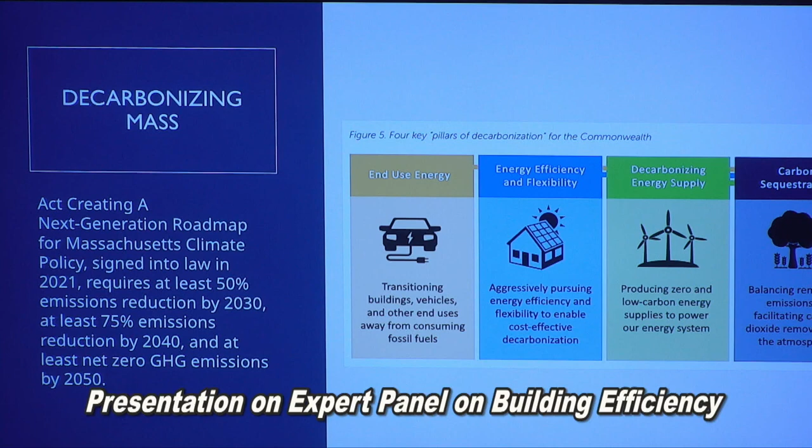So some of you may be familiar with Massachusetts' efforts to decarbonize, part of a global effort to reduce greenhouse gas emissions. But in 2021, the governor signed an act creating a next generation roadmap for Massachusetts climate policy. And as part of that, the state committed to a 50% emissions reduction by 2030, as well as a 75% emissions reduction by 2040, and aiming for net zero by 2050.

There's a few different facets that the decarbonization roadmap laid out for us, touching on transitioning buildings and vehicles to electric, decarbonizing our electric grid, and working on carbon sequestration efforts as well. Tonight, we're going to be focusing more on the building sector and what we can accomplish there.

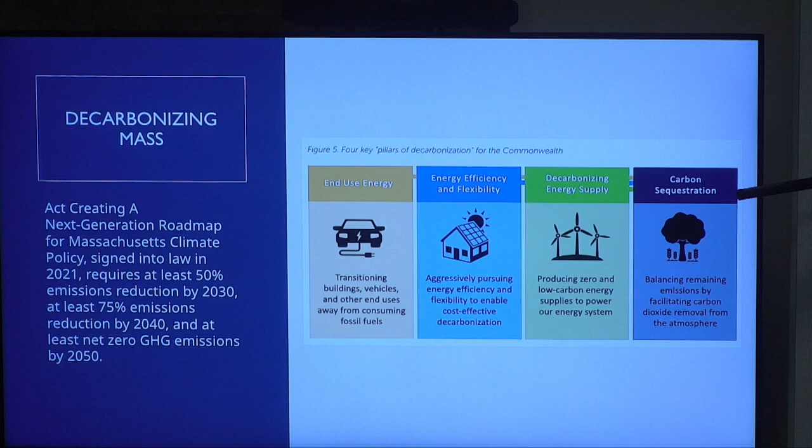Sherborn is also doing its part in Massachusetts statewide efforts to decarbonize, having declared a climate emergency at the last town meeting last year in April, where we are also, as a town, aiming to achieve net zero carbon emissions by 2050, and working to reduce emissions as quickly as possible in advance of that as well. So that sets the stage for some of the work that the town is doing around our Climate Action and Resilience Plan.

Some of you who have seen me before know that we are in the process of working on that, through a grant from the state, a $38,000 MVP action grant to develop that plan, where we're coming up with strategies across multiple sectors in town to reduce greenhouse gas emissions, as well as better prepare the town for climate impacts and be more resilient.

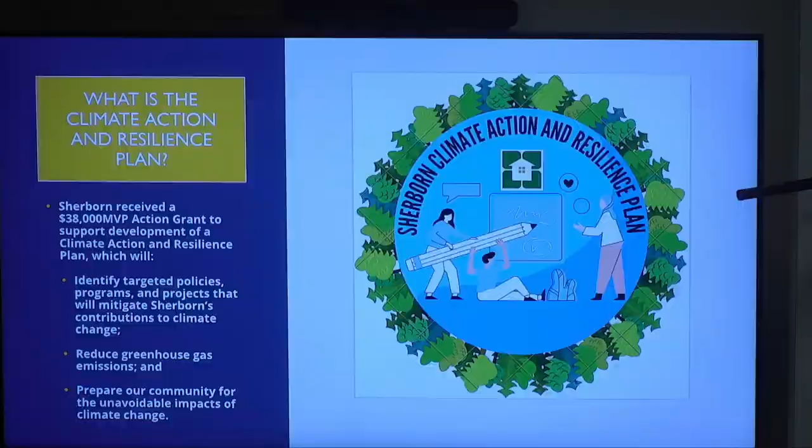Again, just to set the stage for why this matters so much for the town of Sherborn, if you look at greenhouse gas emissions coming from the town, an actual slight majority, 51%, are coming from buildings, and primarily 41.6% coming from residential buildings. So we know that in order to tackle this big carbon problem that we have, to really reach these targets that both Sherborn and the state and our country have set forward, we're going to really need to tackle this emissions and efficiency in our buildings.

And there's all these co-benefits that come with it, like reduced costs over time, more stability in our utility costs, better comfort, indoor air quality, etc.

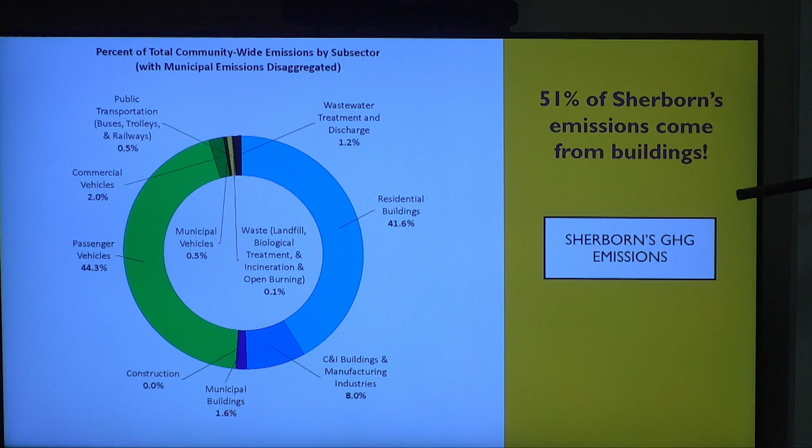So with that, as I've already mentioned a little bit, Sherborn has already been working on this for some time, having become a green community in 2012. And as part of that, had already adopted the stretch code. So all the green communities, as part of their process of becoming a green community, adopted the stretch energy code. We're going to hear a lot more about that coming up in our panel.

And for all green communities, including Sherborn, the updated stretch code that just was released is automatically taking effect. We're going to hear a little bit more detail about what that looks like, as well as this municipal opt-in specialized code. John's going to tell us all the details, all the nitty-gritty that you could ever want to hear about how that works. But that is something that will need to be adopted by each municipality and will be on the docket for Sherborn coming up soon.

I just really like this visual. This is also from the decarbonization roadmap. It really sets the stage for how we're all going to play a role in the future of Massachusetts as it becomes decarbonized. We're going to be looking at electrifying our vehicles, relying more on public transit and active transportation, but also really working on decarbonizing our buildings—new buildings as well as deep energy retrofits of all our existing buildings, because we have pretty significant building stock already here in town.

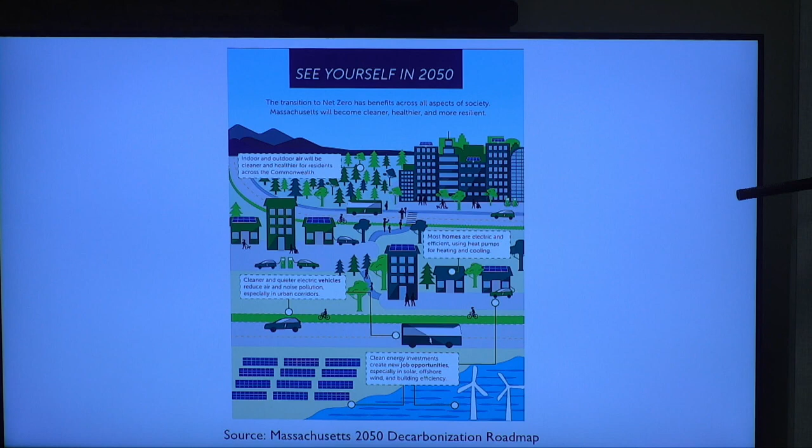And I think that's my last slide. So I'm going to hand it off to Brad.

I don't think we need to hold the mic, actually. Dorothea handed it to me and I just kind of kept holding on. If you're getting poor sound levels from me, I'll just grab the mic and move it more central. Okay, sounds good.

All right, Brad, why don't you start with a quick intro of yourself. Sure. Hi everyone, my name is Brad Karalius. I'm an elected member of the Sherborn Energy and Sustainability Committee. I moved to Sherborn in June of 2018. I have two kids at Pine Hill, a first grader and a fourth grader. We came from Framingham. I am not a professional when it comes to this type of stuff—I'm just kind of a DIYer. I like this stuff, it's important to me.

And I am very data driven—my day job is I'm an epidemiologist. So I recognize the importance of all these initiatives as they relate to ecological health and in turn human health. This initiative is important to me, and it's also something I really needed to do for my own home for a number of other reasons. So I'm just going to take everyone through my own personal journey of home efficiency upgrades and greenifying my home a little bit.

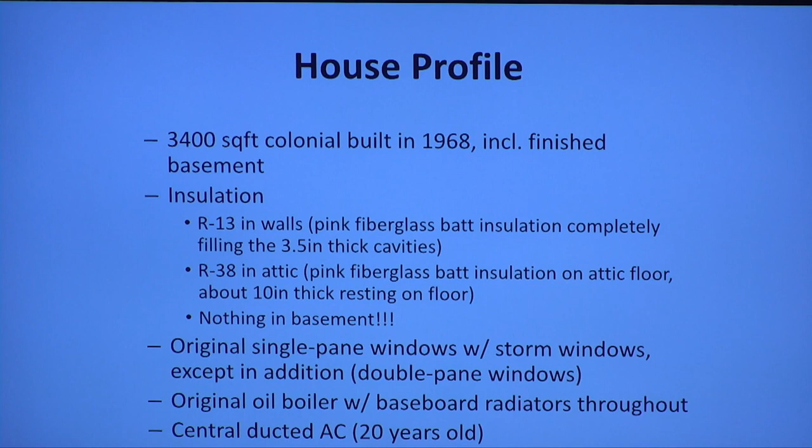It's the pink fiberglass that's in the walls. For the attic, it had a whole bunch of pink fiberglass, batt insulation on the floor, about 10 inches thick. It was a pretty big mess up there. I'll get into this later, but it was interesting—when I was updating the attic and pulling out a lot of that old insulation, I realized it's just a perfect habitat for mice. I discovered well over 1,000 mouse turds and carcasses and skeletons. So it was a hot mess.

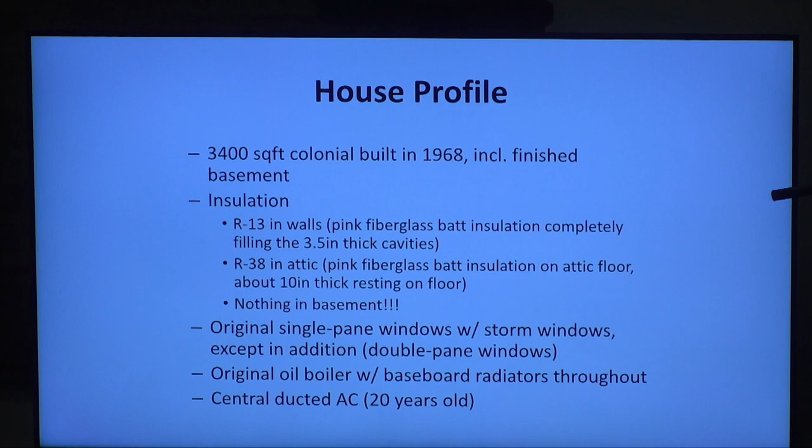There's nothing in the basement, even though it's supposedly a finished basement—there was no insulation in the basement walls. For windows, original single pane windows with storms, with the exception of an addition that does have double pane windows. It had the original oil boiler with baseboard radiators, so that's how heat was distributed throughout the house—a 1968 oil boiler. We had ducted air conditioning, and the system was 20 years old, so it was aging. I recognized all these things, and it had me a bit nervous.

I spoke with the former homeowner just to get a sense of what he was spending on energy, because previously our home was a 1,400 square foot cape in Framingham. So moving here, I figured it was probably going to cost us quite a bit more to heat and cool this place. Here's the description from the former homeowner: he told me that during the winter, they would set the thermostat to a daily average of 62 degrees Fahrenheit with offsets at night.

There was a fire in the fireplace most nights. They consumed about 1,100 gallons of oil per year to heat it just to 62 degrees. And their annual electricity consumption was about 16,500 kilowatt hours. So I knew that this was not going to fly. Again, I have 2 young girls and I have a wife, and they like the house warm.

And so when I heard this, this was my response. I was mortified. I was really worried, and I was like, all right, I gotta start tackling this issue. And so that was kind of the original impetus.

So the first thing I did was I worked on insulation and air sealing upgrades. And this is always going to be your best bang for the buck. It's going to be your fastest return on investment, and it works regardless of what type of heating and cooling system you use. So what I did, again, I moved in June 2018.

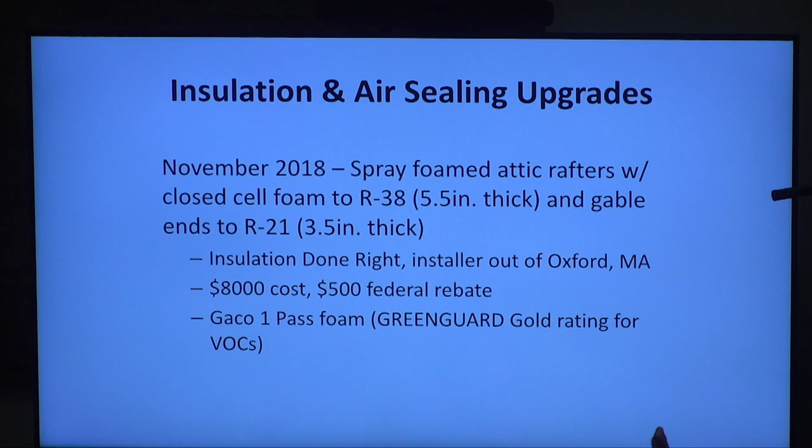So just a few months later, I hired a contractor to spray foam the attic rafters with closed cell spray foam. So the interior of the attic, the ceiling and the walls were essentially spray foamed. So it's insulation, but it's also air sealing, so it doesn't allow air exchange with the outside.

The contractor was Insulation Done Right. They came highly recommended by, I think, Rogers out of Framingham, which you probably see their truck around, but they don't do spray foam, so they told me to go with this guy, and I was really pleased with them. It was an $8,000 job, but $500 in federal rebate, and the product he used was called GACO One Pass.

It has a GREENGUARD Gold rating for VOCs. VOCs are volatile organic compounds. It's just not good for you. You don't want to breathe them. But this stuff is what they use in schools and hospitals, so that made me feel good too. So here's a picture of kind of the results of that. If we just forward, please.

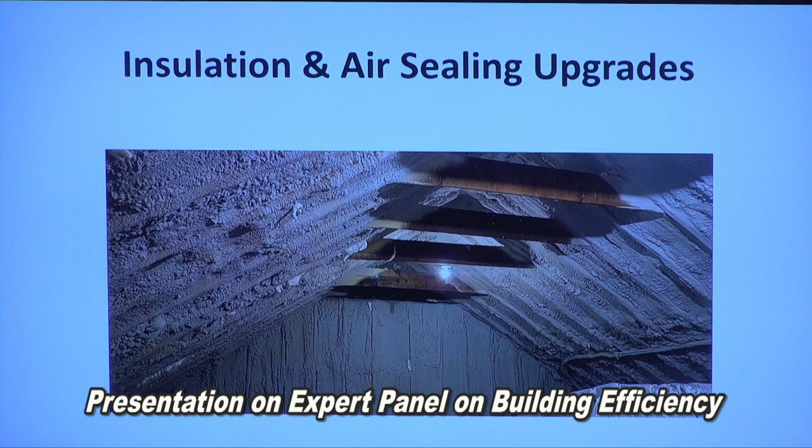So now here's the attic. You can see the foam up on the ceiling and at the ends. The nice thing about this too is it brings the entire attic into the conditioned space of the house. So now the attic is pretty much at the same temperature as my second floor.

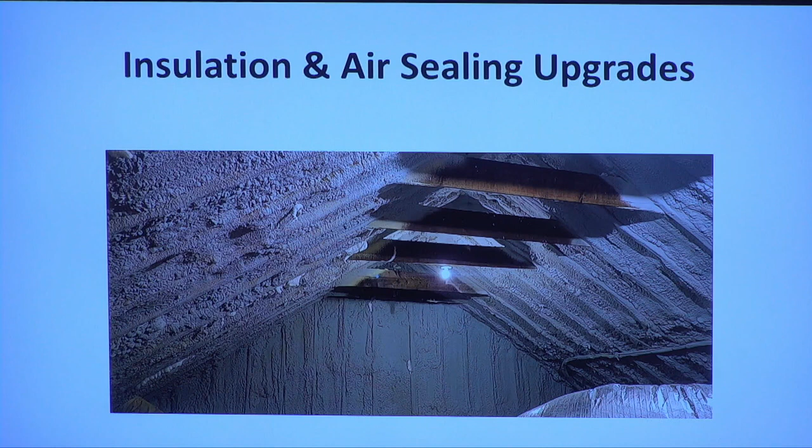And so if you run ducts through the attic, which a lot of people do, it becomes much more efficient now when you have that conditioned air going through a conditioned space, rather than it having to fight against 110 degree temperatures in the middle of summer when you're running your air conditioning. So that was an added benefit too.

So the next thing that I did on this journey was I did some do-it-yourself air sealing and basement insulation, because again, the basement was not insulated at all, but yet it's finished. So someone dropped the ball there. So I installed weather stripping along door thresholds in the basement. I'll have a picture of that too. I spray foamed areas where I detected air infiltration, where you could just feel that cold air rushing in the winter time.

And then actually, just up the street from us in Framingham, there's a company that has reclaimed insulation foam panels that you can get for really cheap compared to brand new. And so I ended up going to them. I bought a bunch of reclaimed foam panels, and I've been putting that up against the interior concrete basement foundation walls.

So here's just a couple pictures of what I've done. On the left side, you can see the weather stripping. It's just this kind of line of white foam. You just buy it at Home Depot. It's got adhesive on it. You just stick it right on. The door presses up between it and the threshold, and it prevents air from moving through.

Now, during the winter time, before I had done this, I just felt cold air rushing into the basement, and the heating system had to fight hard against this. And so these small little solutions that I implemented had a profound impact on how much energy I was using to heat the basement, and the comfort level too.

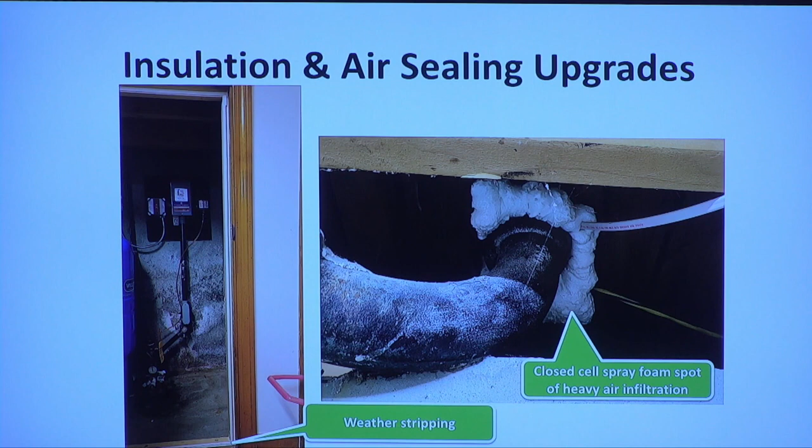And so on the right side, it's just where I used a can of spray foam to hit another spot of air infiltration where a pipe is kind of leading to the outside. We can advance, please. And so this is, you can see some foil-faced foam panels in my mechanical room.

Up on top, I insulated the rim joists and sill plate with more foam and spray foam. And so I'm actually pretty proud of this work because, over the cold snap that we had a few weeks ago, my basement never got below 50 degrees. And we didn't have any burst pipes or anything, and we have a lot of water pipes in the basement. And I do attribute this to a lot of the work that I did.

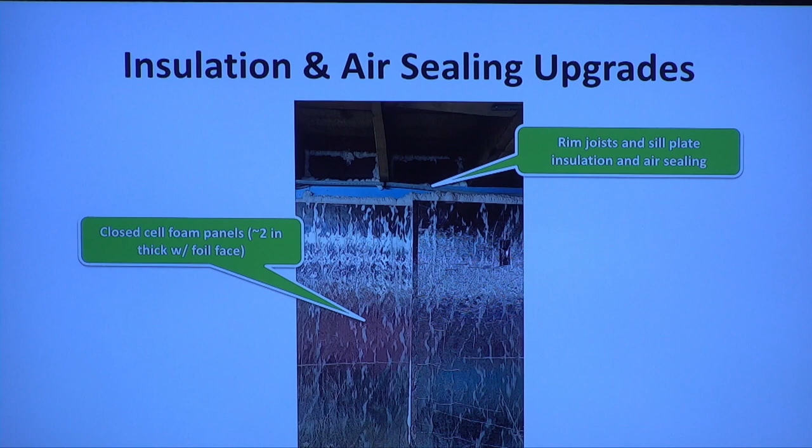Because in our neighborhood, we had a lot of neighbors who had some pretty serious damage. But by hitting all of these spots of air infiltration and insulating the basement, it kind of equilibrated to that ground temperature in the area, 50 degrees, and I saw that on the thermostat, so that was really cool to see.

So the next major retrofit I did was I stopped using our old oil boiler and I installed air source heat pumps to heat and cool the entire home. This was done in March 2019, so a little bit after the insulation work, the spray foam work, but still very early in the process. This system was sized to meet the heating and cooling demands of the home. What it entailed was 2 Mitsubishi Hyperheat multi-zone heat pumps.

So these two heat pumps sat on the outside of the house, and they would each feed to 3 indoor air handlers, mini air handlers that would sit on your wall. And those would spit out the conditioned air, whether it was hot air or cold air. The combined heating capacity of these heat pumps was 57,000 BTUs at 5 degrees Fahrenheit. I did have my house evaluated to check what it needed under that design temperature, and it did meet that demand.

It allowed me to get $8,000 in rebates from Massachusetts because they were sized to meet the entire heating load of the house at that low temperature. The installer was Tom Fricker out of Franklin. He was great. We had to adjust the system a little bit, and he was very receptive to my asks there, so I was really pleased working with him in the long run. It was 28 grand for the system. Then you subtract out the 8 grand in rebates. I financed the rest with a 0% loan through the Mass Heat Loan Program.

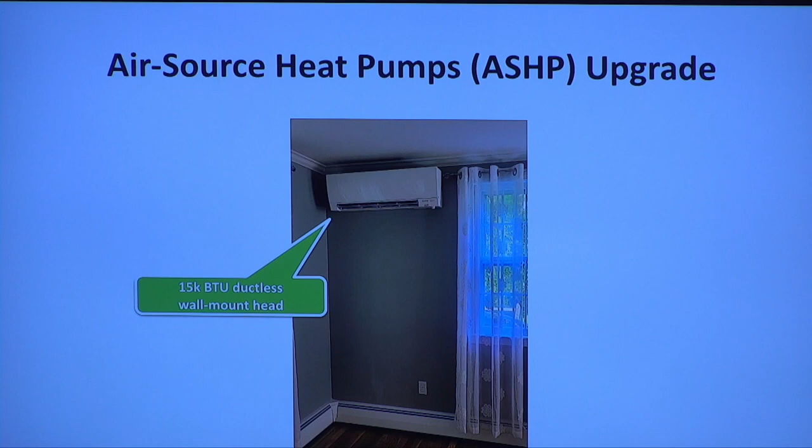Here's a picture of one of those indoor air handlers. I call them heads. This one puts out 15,000 BTUs at capacity, and this is in the living room. He's the big guy because you match it to the space that they need to condition. If we want to advance, please. The previous slide was on the first floor. This is also on the first floor of my house. Now we have a 12,000 BTU unit. This is in the den that faces out to the backyard.

Something that I wanted to call out here was that I ended up putting in a reversible ceiling fan, which really helped with, I felt, comfort and efficiency. Because with our older homes, and my home's over 50 years old, you're gonna have a little bit of unevenness with heating, based on the windows not being super efficient or the walls. But partnering this ceiling fan with that air source heat pump air handler turned out to be a really great pairing, and I've been really pleased with it. So when I do my energy coaching, I oftentimes recommend this kind of pairing.

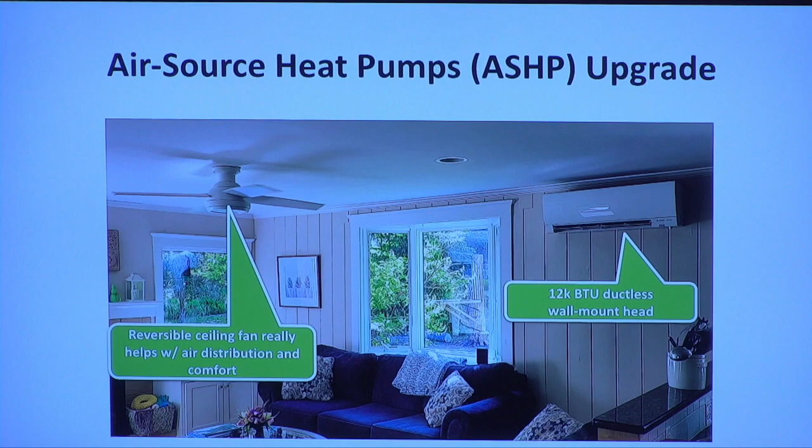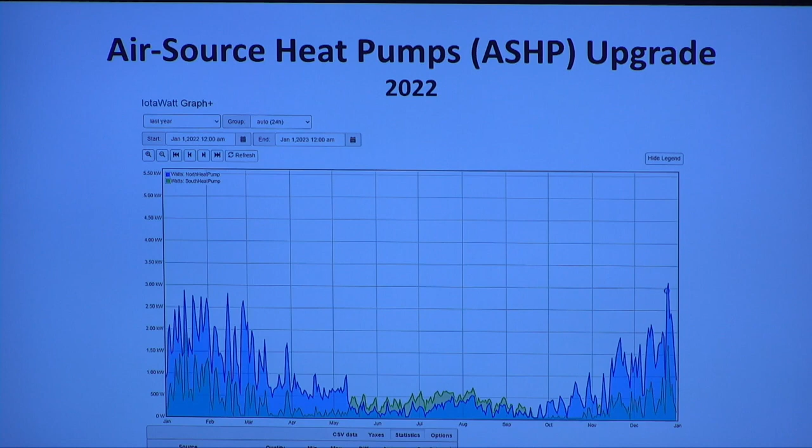On top of that, the incentives include, I got in early in the SMART incentive system, so I was block 2, which means for every kilowatt hour my solar panels produced, I got back from the state about 13 cents. So you multiply that, they make a good amount. So you crunch the numbers, and it ends up being a nice paycheck. And then of course there's net metering too, which means that every single kilowatt hour that your panels produce gets credited towards you. Even if you're not actively using it, it's still going to get credited. And so it's not going away.

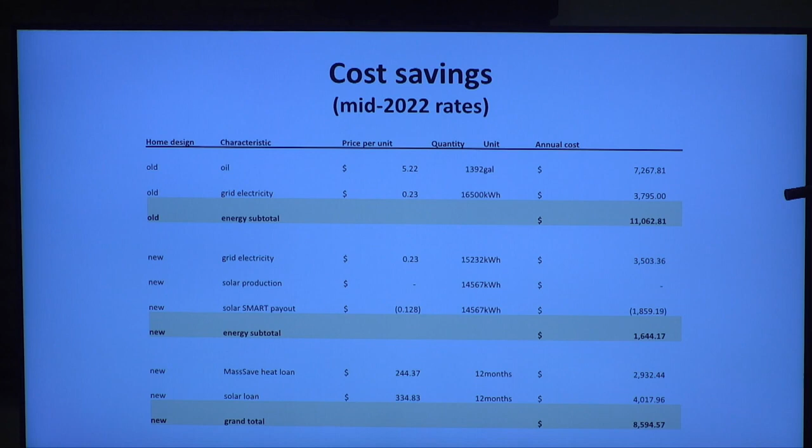So this is kind of my last big slide. This is where I crunch numbers to understand, had I kept my old system in place, what would I be spending in energy, and under the new system, what am I spending. Dorothea, one of our sustainability coordinators, had me do this, and I hadn't done it before. When I crunched these numbers, it blew my mind. It was pretty crazy.

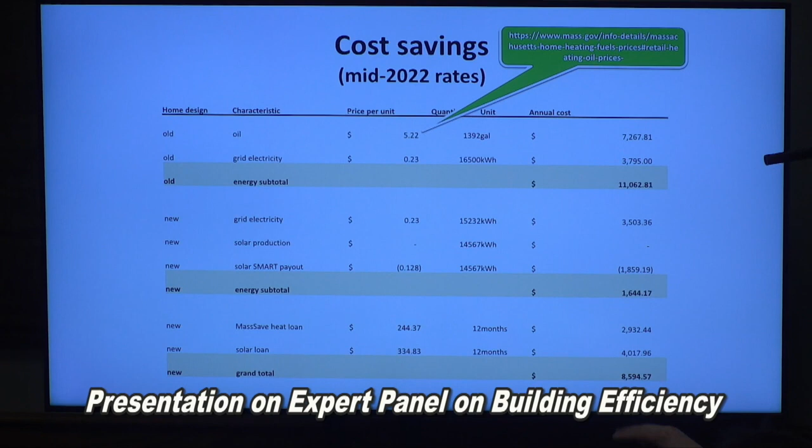A lot of these prices, like for oil, I took from reputable sources. Massachusetts has updated prices on oil, so I pulled these statistics based on mid 2022 rates. Oil was going at a little over $5 a gallon. The former homeowner said they were using 1,100 gallons. I scaled that up to about 1,400 gallons because they were a family of two only heating their house to 62 degrees, and we wanted it at 70. So this is probably a very conservative underestimate of what we would actually be using for oil.

So it was $5 for oil, 23 cents for grid electricity. I used their 16,500 kilowatt hours. I crunched the numbers - I would be spending 11 grand per year under the old system.

Under the new system, I consumed about 15,000 kilowatt hours of grid electricity. The rest I covered with my solar production. That's a 3-year average.

So that 15,000 kilowatt hours of grid electricity, that's what I consumed in 2021, at 23 cents per kilowatt hour. The solar production is a 3-year average. And then I have my smart payout, where I'm getting about 13 cents per kilowatt hour from my solar panel production. So you crunch those numbers, and I end up spending $1,600 per year. So it's $11,000 per year versus $1,600 per year.

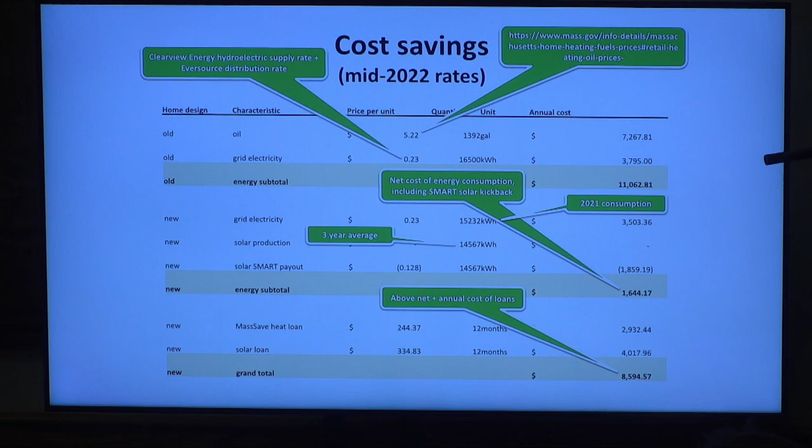So that's my path. I've massively offset my carbon, I've made the house more comfortable, and I've saved money in the process. So it's kind of cool. It's a great story. Thanks.

Sure. So I am a certified passive house builder. I have been in the green construction world for a little over a decade now. I got into it because I have a deep appreciation for restoration, and my first introduction was doing retrofits in a restoration project in Lowell, Massachusetts, which was at the time the oldest LEED Platinum certified building in the country. That was my introduction to green building, and I've since continued to pursue that, with the aim of building better.

That has been my goal since I started over 26 years ago building. I did a couple of restoration retrofits, one on the Concord Scout House in Concord, Massachusetts, and the UTEC, now the UTEC Youth Center in Lowell. I've since gone on to become a certified passive house builder, which is the most stringent energy code in existence. I've been engaged in passive house for about six years, applying these standards, and I applied it to my own house as well. It is not a certified passive house, we don't need to go into that, but I'm applying all of these principles and standards for several reasons.

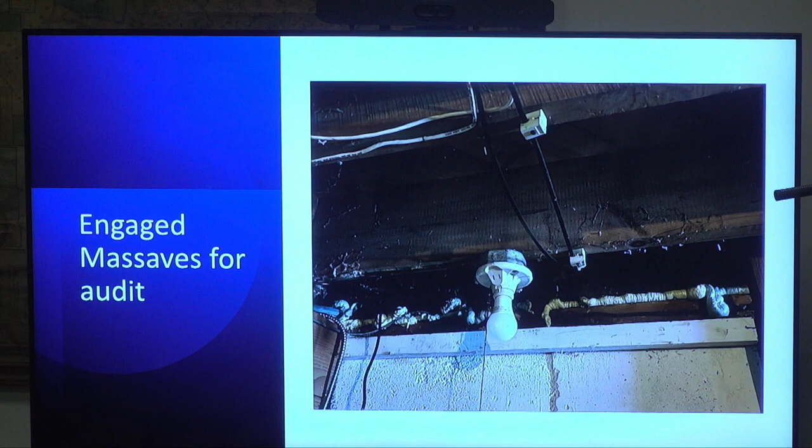At the time when we bought the home, it only had an electric range where half the burners didn't work, so we had to replace it. I wanted to cook with gas because I'd always thought cooking with gas was better, but I didn't have that option. So I got an induction range, which is something I strongly recommend. Now that I have one, I will never go back. It's extremely efficient, I've saved a lot of money on electricity, and I can boil my hot water for tea in a minute. It's amazing. Until I owned one, you couldn't have convinced me otherwise.

So Mass Save came out, we did the audit, filled out the paperwork, and were able to get a company to come in. If you advance to the next slide, this is another example of air sealing around wire penetrations, and the whole perimeter of the basement was exposed so we could get at it.

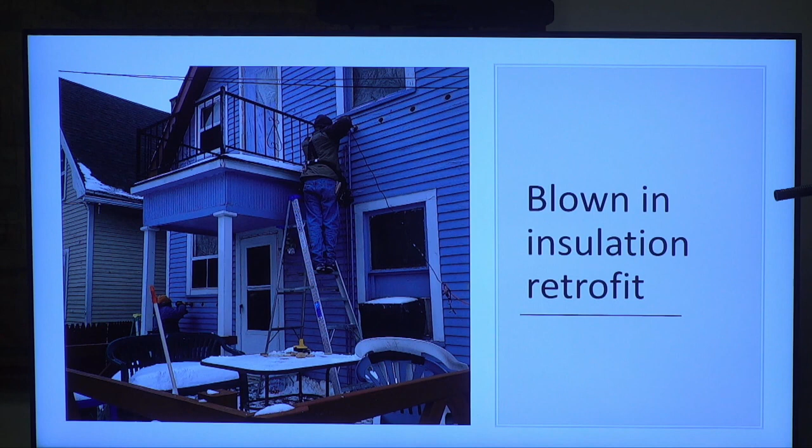This isn't my house, but it's an example of how they do a blown-in insulation retrofit. They remove pieces of siding, drill holes in several locations in a stud bay between the studs, use a tube, and inject cellulose, recycled newspaper and cardboard, into your wall cavities. It's a great insulation, it's a recycled product, and it's fairly inexpensive.

With the rebates, they covered 75% of the cost. So to insulate my entire house, which had none, the bill came to about $7,800. We paid $1,800 out of the whole thing.

That was advanced to the next... sorry, slide. That's right, I'm so fascinated I stopped.

With the original single pane windows, I knew I was going to have to replace those. But even at the time, just blowing in the insulation, I didn't have the budget or the money to replace my windows or do all the work you're going to see next. Just the insulation alone and the air sealing dropped my oil bill by 60% right off the bat. My heating bill was astronomical for a 1,500 square foot cape, oil burning with zero insulation. I was definitely filling my tank much more than you were. So that decrease in cost was immediate, and even the experience in the space was immediate.

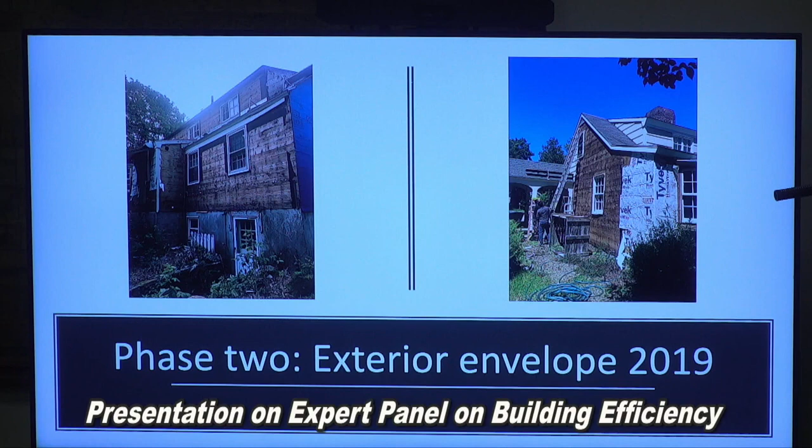A little bit later on, we saved up some money. Being a professional builder, I knew I didn't want to just put replacement windows into the openings of the old windows, I wanted new construction windows. That meant I was going to have to strip away about 40% of the siding on my house anyway, so that was an opportunity to strip the rest of it. I also needed a new roof, it was growing moss, which looked kind of cool if you're into living roofs, but that's not really how it's supposed to work. So I knew I had to do a complete renovation of the exterior, and I saw that as an opportunity to really apply passive house standards and make this home as efficient as a 1951 Cape can be.

I did this alone, so it took a long time. You may have been driving by, I'm sure I might have waved at a couple of you.

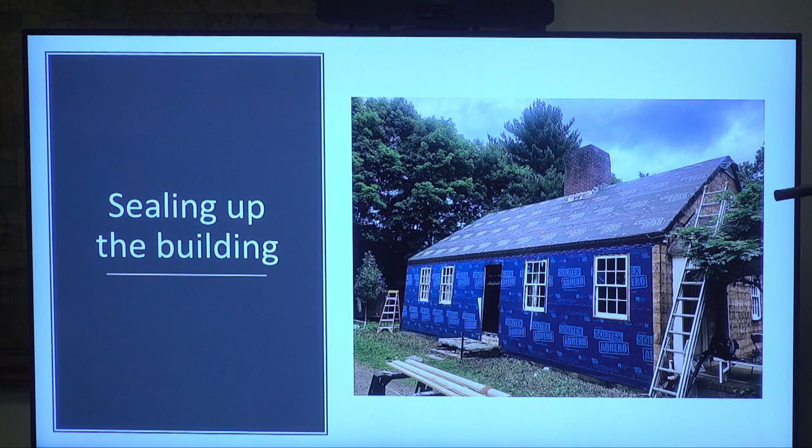This is a vapor open membrane, a special membrane designed in Germany that's been used since the 90s. It makes a home airtight, but if there's excessive moisture inside the wall cavity, it allows that moisture out. It's counterintuitive, but it works sort of like a Gore-Tex jacket. When there's excessive heat and moisture, it opens up to allow the moisture out, but when it's really cold, it tightens right up, creating a nice air seal and stopping the transfer of energy.

I completely stripped out the building, even cut the overhangs off. When wrapping a building, you want to make a continuous connection, roof to walls, walls to foundation. It's really important to make that connection at the foundation, and there are primers and tapes that will stick to concrete. Little by little, I wrapped this building, tightened it up, and then proceeded to put in the windows.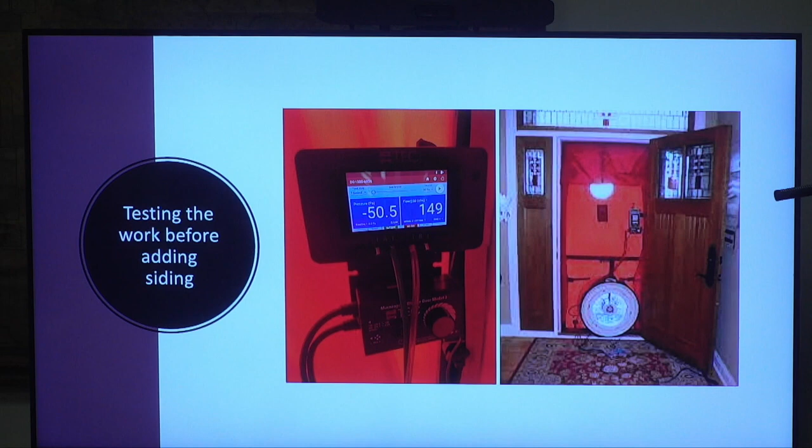This is the equipment we use to test it. You set it up in a doorway, it intentionally sucks all the air out of your house, and then measures the air going across that fan at a certain rate. It will tell you how much leakage there is in your house and how many times the heating system has to condition the air in that space before it leaks out of the building again.

So heat moves. We all know that heat rises, right? That's pretty common knowledge amongst everyone. But the reality is heat moves in all directions. Yes, warm air rises, but it radiates, and through convection, it's constantly moving through your space. So we're dealing with convection, conduction, and radiation in many different ways throughout our building.

So like if you think about the chair you're sitting in right now, if you were to get up, go outside, and come back and sit down, the chair would seem warm to you. That's because you're radiating your body heat into that material. So the exact same thing is happening in our buildings. It's our conditioned space warming up the drywall, the 2x4s, the sheathing, and the siding.

And just like a battery will pull positive energy out of it to operate, our buildings are pulling that heat right through the material and out into the cold space. Heat always moves to cold. That is just a scientific fact, and it moves in all directions.

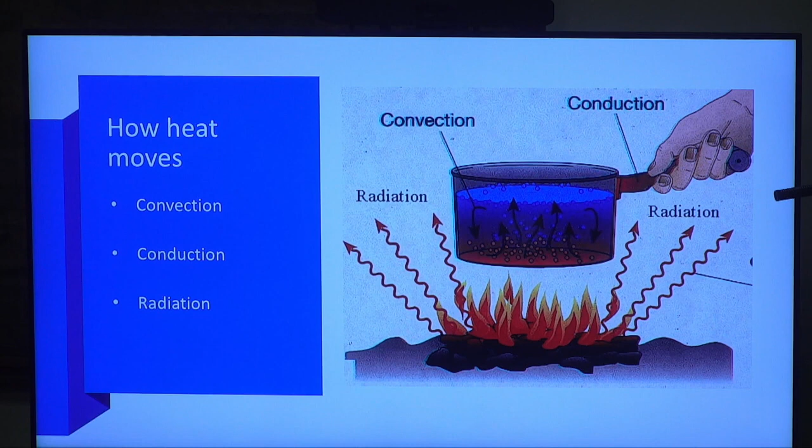So stack effect. For you that have wood stoves, you understand that you light the fire, the smoke goes up the chimney, but it's got to bring air from somewhere else, right? So it's pulling it through the vent and pulling the air from the space so that it can allow that smoke to go up the chimney. Well, your building works in the exact same way.

You're conditioning the space. We're inside of it. We're 98.6 degrees, we're creating heat. We're cooking, we're creating all this warm air, which rises. And if you think of your building like a big chimney, that air is rising up through your space and out through your attic and through the vents and all the leaks.

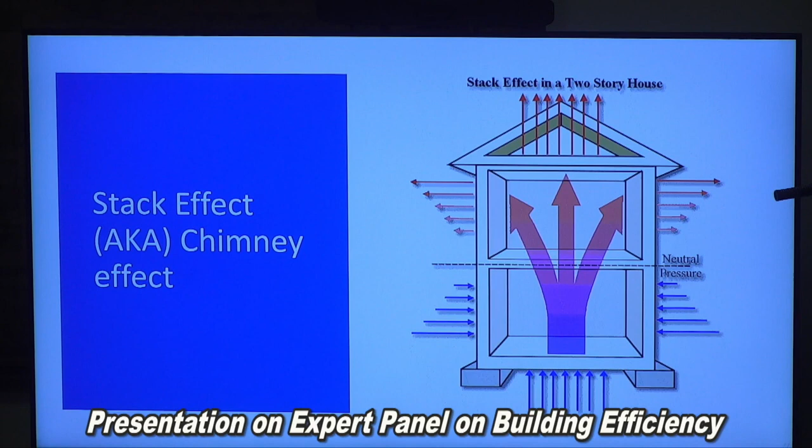And it's pulling cool air from somewhere else. So all the cracks in your foundation, if you've got gaps around your pipes coming up through the basement floor, or you have a hose bib that goes out for washing your car, it's pulling that cold air through all those gaps and bringing it into the building. So now your heating system has to condition that air again, and then it sends it right back up. It's a constant chimney effect happening through your house.

So we use this term thermal bridging, which in the passive house world, our buildings, we aim to make them thermal bridge free. So what that means is we're actually creating a break from that energy being pulled through your 2x4s, your flooring joists, and your rafters out into the cold environment. And there's a couple methods of how we actually do that.

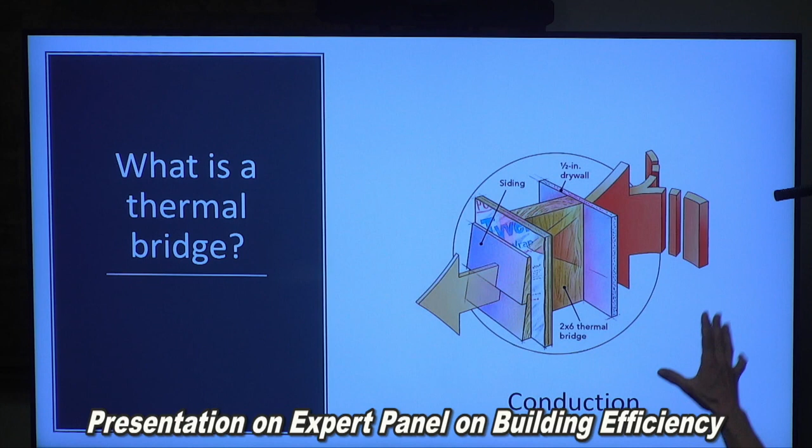If you're remodeling your home, there's really one go-to technique, which you're going to see in the next slide. But before that, just to clarify: your space inside is 70 degrees, and let's say it's 20 degrees outside. That drywall is heating up, transferring it to the 2x6, transferring it to the plywood, which is transferring it to all the solid materials that are pulling that energy through the building.

If you go to your next slide, please. So this is a picture of a code-built house prior to 2021. My friend John Hyde's going to talk a little bit more about the code portion of this after. So this was actually a well-built house. It's well insulated, we really don't see any gaps in the cavities.

But in the cavities you're getting an R value, and at that time it was around R28. I really haven't paid much attention to building codes, because I build passive house, which far exceeds the codes, so I'm building to a different standard. But you can see through this thermal image these are all the 2x4s, the floor joists, the rim joists, the rafters—all of those are a thermal bridge, and they equate to R7. You get about R1 per inch with wood. So about 25% of your building is solid wood, maybe a little bit more. So you may have R28 or R30 in your wall cavities, but 25% of your building is only R7.

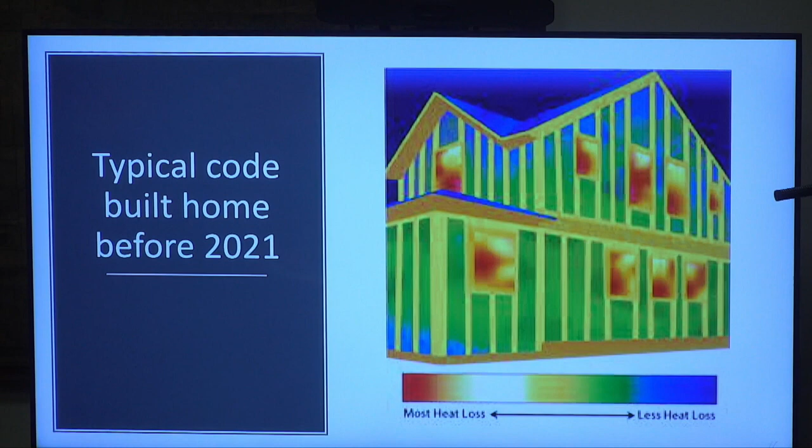So back to my house again. What we're doing is creating a thermal break. Foam does not conduct heat transfer.

That's an R12 sheet good, foil-faced. It's just like your favorite cold beverage from Dunkin' Donuts, iced coffee. A lot of people ask, can I have a styrofoam cup? They put it in a styrofoam cup, and now it breaks that warm summer temperature from touching the cup and creating the rings, sweating, and condensation.

That's what's happening in our walls. When you have an extreme transfer from warm air to cold air, there's condensation when that warm air hits a cold surface. Similar to your favorite adult beverage you take from the fridge out to the picnic table on an 85-degree day—within a few minutes it turns to condensation. That's the relative humidity in the air condensing when it hits something cold.

That's also happening inside our walls. If you could look with a microscope or had x-ray vision, with an uninsulated wall and it's negative 12 degrees out, like it was two weeks ago, the warm humid air going through your wall cavity and hitting the sheathing turns to frost on the inside of your wall. Eventually that melts and goes somewhere, and wet wood creates mold.

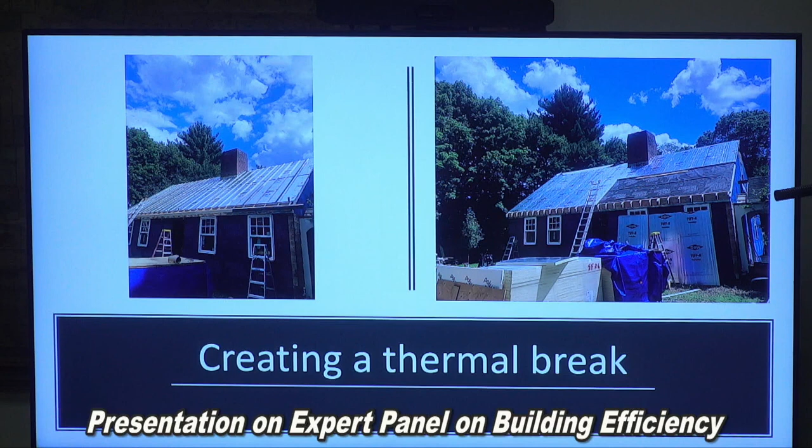When the sun is baking down on that roof, I've clocked temperatures of 146 degrees on a summer day on the roof surface—that's radiant heat, now heating up your attic space or your bedrooms in this little cape. You're actually taking on heat from the outside, just radiating through your roof, unless you create this thermal break and vent space.

Move to the next slide.

I put in new construction windows because I knew there was no insulation in the walls, so it wouldn't do me much good to just put a replacement window in my existing frame. I decided to take the windows out and put in new construction windows because I can tape those up and seal them much better to my building assembly than replacement windows.

So the entire building's now been wrapped. That's just conventional tar paper on top of my second layer of sheathing—I don't have to use anything fancy. Tar paper is an awesome product we've been using forever.

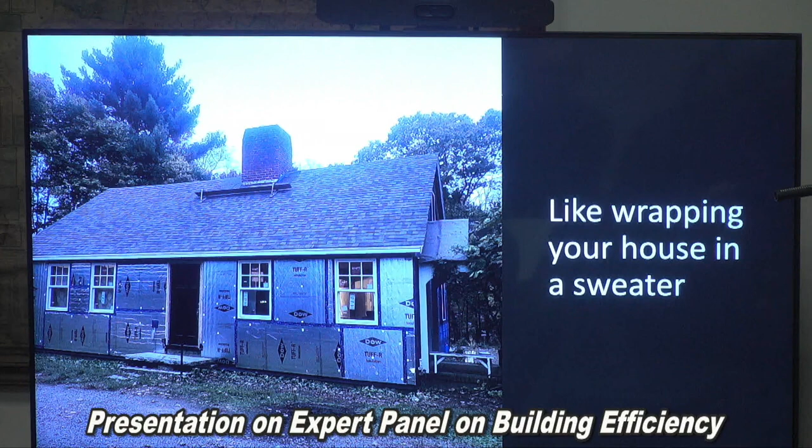All the seams get taped on all the foam, giving myself a second shot at air sealing everything. And then I just went ahead and put a new roof on.

Now your sidewalls, similarly—this is called a vented rain screen that we've created. There are a couple different ways you can do it, but this is the most common. These vertical straps are the nailer for my siding, and what you can't see behind this little trim board on the bottom is I actually have vent strips, so air can flow up behind my siding, all the way up into my vented soffit, and those wood strips on the roof create a vent that allows it to go right up through convection. The warm air just naturally follows that path right out the top of the house.

So now when it's 140 degrees baking down on my roof, because I have that little airspace, you can measure the temperature at around 85 degrees. It's cooling it at the surface before it heats up my building and creates uncomfortable conditions in the attic space.

Once I sealed it all up, after working all day, my dirty socks—that smell lingers because now my building's really airtight. So I've got to bring in a mechanical system to give me good, fresh air exchange.

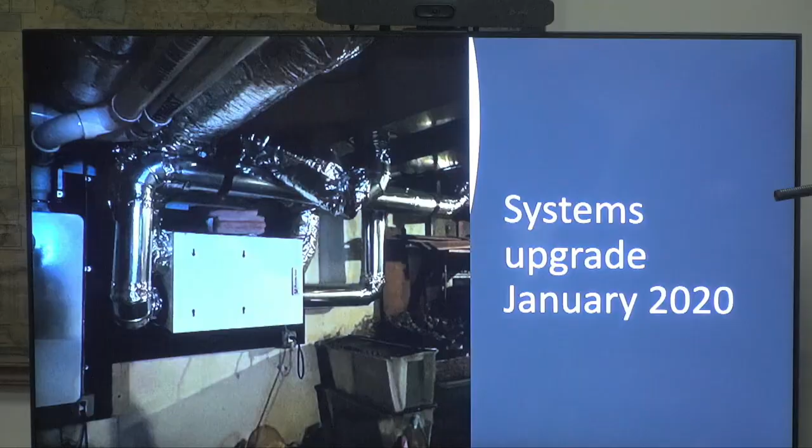So now I'm preheating that 20-degree air that's outside to maybe now it's about 64 degrees by the time it passes that coil. And my heating system only has to work just a little bit just to bring it up to the temperature I want it. So I'm not just blasting my house with like 15, 20-degree air as I'm bringing fresh air into my house. There are filters in this that are already filtering for the first time the pollen and the dust that's out in the air before it enters my HVAC system.

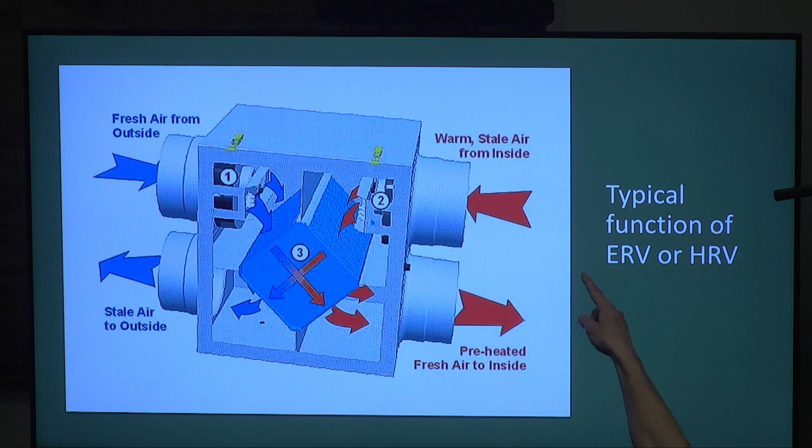Next slide, please. This is a diagram of exactly how that works. You can see the fresh air from the outside coming in at the top, comes across that coil at the same time that the warm air from in the house is going out and transfers that heat to the cool air coming in. Slide, please.

Ooh, well, slight fail on that slide.

My fault. This is my new heat pump system, which I could just integrate right into my HVAC system because it already existed. I like this because it's a whole house heat pump, and I don't need the cassettes, or the heads that Brad was describing earlier in the different spaces in my house. This also has a very high MERV rating, which is a high filtering system.

So I've already started the filtered air from outside through my ERV, which stands for Energy Recovery Ventilation. There's HRV, Heat Recovery Ventilation. They both do the same thing. The only difference is an ERV will also transfer moisture, where a heat recovery ventilator only transfers heat. But that's beside the point. So now I'm filtering the air in my house a second time with a much more dense filtration system.

It cuts down on the dust, and for somebody that used to get sinus infections twice a year annually, I haven't had one since I put this system in. And that's just my personal health outcomes. I know this is true for others who have also had skin irritations.

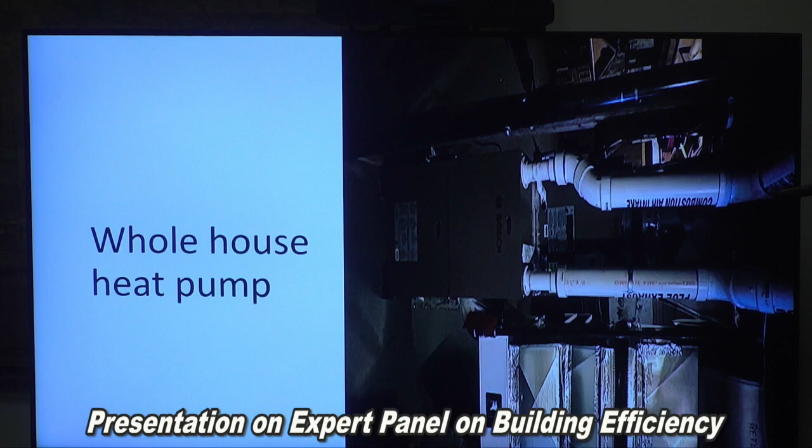Some issues. Bringing that mic towards the other mic. No?

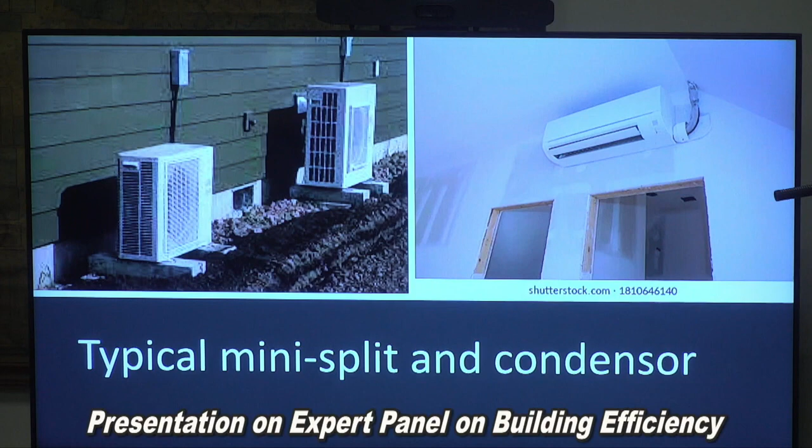Okay. So, and Brad had shared, these are your condensers that live on the outside with your heat pump system. This is similar to the heads that Brad has in his house. It's great for retrofitting a home. If you've got radiant, old boiler, radiant finned heat, this is a solution for supplementing or replacing, where you don't need to add ductwork.

This is the house today. If you drive down Farm Road, take a look over, you'll see my Adams and Beasley Associates truck parked out in front. And, you know, I didn't change the look of it because I really love my little Cape. We are going to be adding an addition coming up soon that will be built to the Passive House standard.

And my next steps, as my budget will allow, is I do intend to add solar. And the only reason we didn't do that is knowing we had another phase. We had another addition that was going to come up, and I needed to be able to calculate how much more energy I'm going to need to put into that building and how many more light fixtures and so on and so forth. I wanted to wait so that I could get the full big picture and size my system appropriately. And eventually my house will be net zero.

It isn't yet, but I've been taking all the proper steps to get me there. Next, I do need to insulate my basement, much like Brad. I just haven't had the opportunity, but will be in the next phase. So that'll be the next big step, adding the solar to the back once the addition is complete. Should be one more. And the other part is that I don't have insulated ductwork. I'm going to insulate my ductwork. My system will have to work less hard to get the conditioned air to the space that I need it.

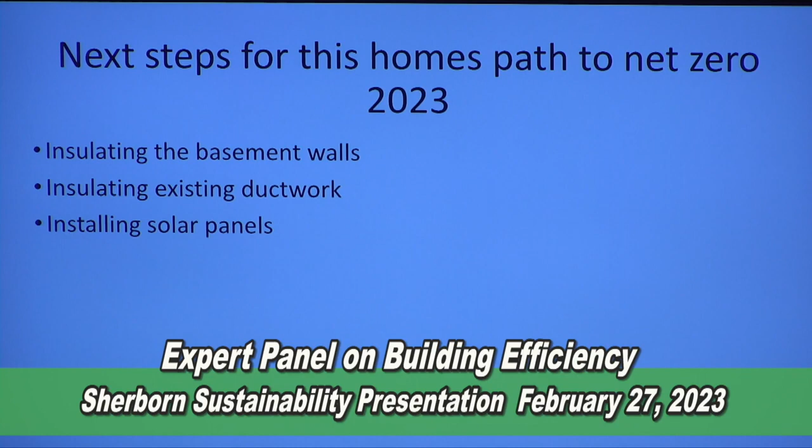That pretty much wraps up at least this particular project, and hopefully gave you a good baseline on what some of these upgrades mean. And the other part that I would recommend, because I didn't get a chance to mention it, is that I will be hiring an energy consultant when I do my addition. I know how to do all of this work, but what they're going to do is help me to make sure that I've sized my system right. They have a much better understanding of all of the rebates. Plus, I want a third party that's going to verify all of these conditions once it's finished so that I can get those rebates.

And for those of you who might be doing a remodeling project, I would highly recommend hiring these consultants because they are a third party verifier. If you're hiring a contractor, you don't want to necessarily just take the contractor's word for it. This person is going to advocate for you and come and do the inspections necessary to make sure it's done right and they haven't missed anything. Because it is important. The tighter that we make the buildings, you have to know what you're doing because there is some risk that if it isn't done properly, it can cause other issues unintentionally.

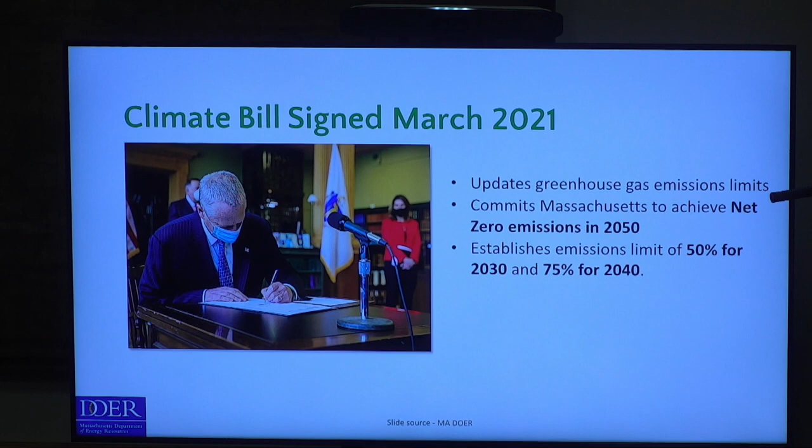Okay. So these recent code upgrades are a result of former Governor Baker's Climate Action Plan, which sets a mandate to reduce carbon emissions in Massachusetts to 0 in 2050. Buildings represent 39% of the emissions here in the state. So obviously a big target. We've got to address them. Next slide.

So new buildings are easy. We just talked about retrofits: a lot of work, a lot of planning, logistics. You're living in these buildings. They don't always pay off. But a new building is pretty easy. It's a no-brainer. With the Mass Save incentives out there that cover all the additional soft costs, builders across the state fully understand the benefits, and people aren't scared of this stuff anymore. They know how to do it. The trades are now familiar.

So basically any new building built after 2023, if you add up the square footage, is estimated to represent about 27% of the built square footage in 2050. So if we can eliminate the emissions from these buildings, 27% of our building stock will essentially have 0 emissions.

So there's a base code, there's a stretch code, and there's a specialized code. We are a stretch code community here in Sherborn. But did you say it was 2012 or 8? I can't remember. Well, 2012. So the town voted in 2012 to adopt the stretch energy code, and as part of adopting that, we have to adopt any other updates to that stretch code. The newest one became in effect January 1 for residential, and it'll apply to commercial buildings in July. We have not adopted the specialized code in Sherborn.

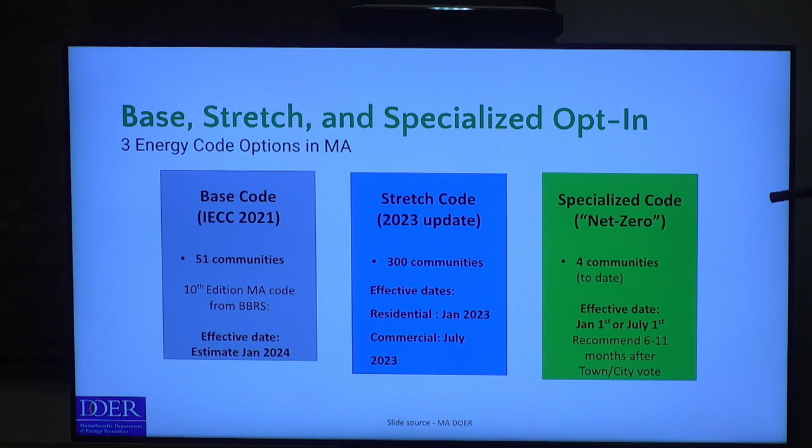So we can zip past this one. There's 2 parts. There's residential, which is going to be most relevant to Sherborn. There's also commercial; we do have some municipal and commercial buildings, so I'll just touch on those lightly at the end. I think you hear the theme here after their presentations. It's all minimizing energy loads, right? You do that with air sealing and insulation. Once you bring down the loads, you can replace your mechanical equipment with electrical equipment.

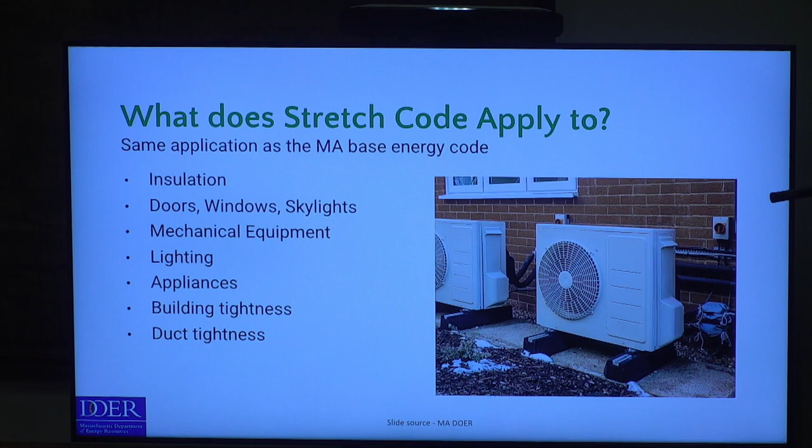Basically, heating demand is the highest energy demand in Massachusetts. So if you have a tight building that's well insulated, you can efficiently heat and cool it with electrical equipment, heat pumps, and ERVs. And then you can put solar on your roof to provide clean, renewable energy for your HVAC. So the exterior enclosure is like a windbreaker, and insulation is like a fleece underneath. You put those two together, you stay nice and warm in the middle of the winter. Same theory applies to the house. So we could flip to the next one here.

So to Keith's point, Keith's a certified passive house builder. Brad's an advanced DIYer, and he likes to dig into the data and the research. So the code is going to emphasize performance, and you need somebody that knows what they're doing. A consultant of some type, a HERS rater, certified passive house consultant. You want somebody that's going to do a double check.

Because it's simple in concept: air seal, insulate, electrify, and add renewables. That's sort of the four easy steps. But there's a lot of details. Keith was pointing out details of his rain screen and your weather resistive barrier. Where's the dew point in the wall? Is it going to be in the middle? Where's it going to be? So you want to try to study all that stuff to make sure that you are in fact getting a healthier building and not doing the opposite.

So get a consultant. There's incentives out there for consultants. There's aggressive incentives that are offered by MassSave to knock down all those soft costs so that you don't have to worry about that sort of thing.

And then go back one slide. So I just want to point out that they were both talking about air sealing. If you have a small little hole in your envelope, with that stack effect that Keith was talking about, the bigger the stack effect, the more pressure on that little hole, so it just draws even more air up through. So a blower door test is easy—even if you're not getting a rating—just to find where your leaks are so you can seal those up.

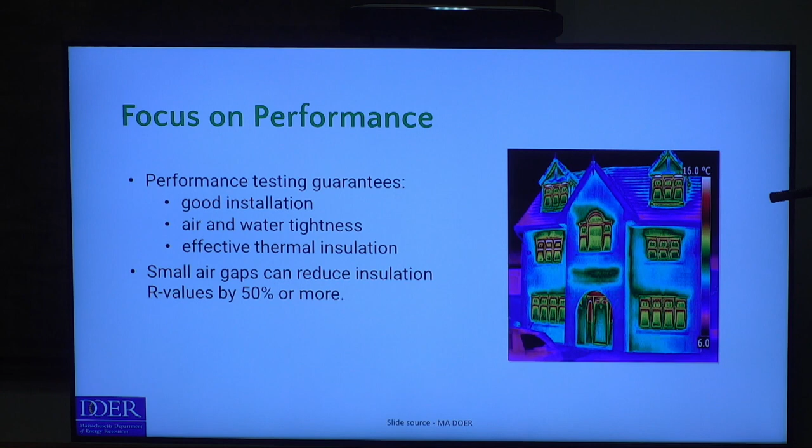All right, you can flip to the next one. So you'll hear a lot about HERS ratings in the building code. It stands for Home Energy Rating System. Somebody looks at your house, your walls, your mechanical equipment, looks for thermal bridges, air barriers, insulation, windows, doors, all that kind of stuff, and they give your home a rating. It's all based on, I think, a 2006 code home, and they compare you to that. So 100 is the standard home, and if you're at 49, you're 51% better than that standard. It's just kind of a relative performance measure.

All right, so the base code's being rolled out, but the base code isn't going to be in effect until 2024. The stretch code is in effect right now. So just to give you some similarities—although since we're already on a stretch code, we really need to focus on the stretch code stuff—EV wiring has no change there, solar ready has no change there, same as the base code. So there's no premiums for any of this stuff under the stretch code because it's already required.

They do away with the Energy Star and the prescriptive code. In the stretch code, you can either build to a passive house standard—that's what Keith was talking about—and an ERV is required. Well, heat or energy recovery is required, so that's an ERV or an HRV. In New England, because of our cold winters, we typically use ERVs, so you can transfer the humidity from your outgoing air to your incoming air. So you transfer energy—heat and humidity. In the wintertime, you don't want to bring in super cold air from outside with low RH and heat it up, because then it gets even drier. So it requires typically an ERV in Massachusetts.

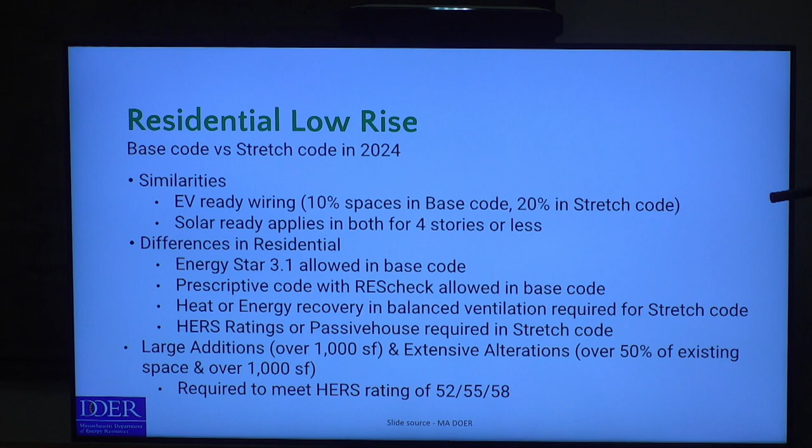And another big change is that it does apply to alterations, additions, and renovations, whereas it did not in the old version.

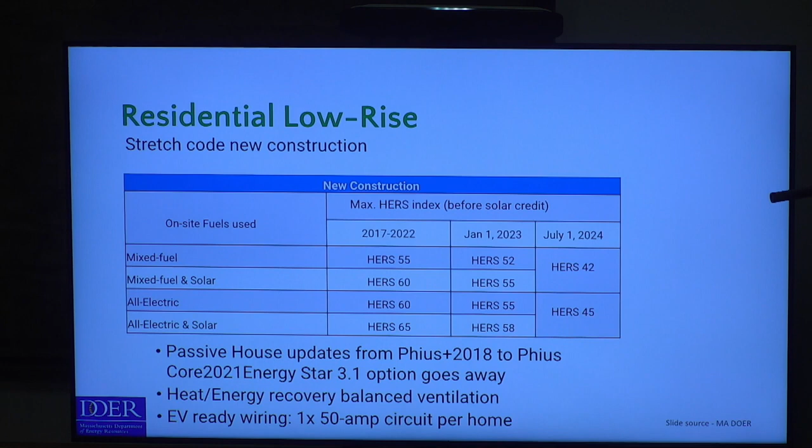Real quick, I'm going to just kind of buzz past this one, but basically this just gives you different HERS ratings, and you can see that the HERS ratings are going to be ramped down—they're going to be more strict. So the lower the number, the more strict the HERS rating is. And as we get out to July, it's going to drop even further.

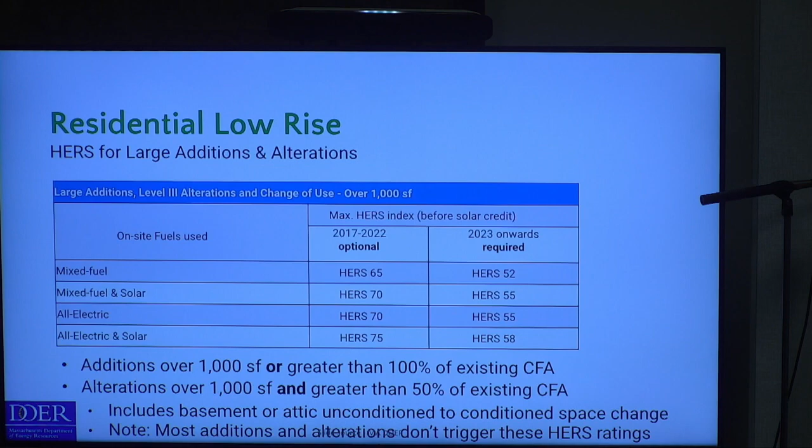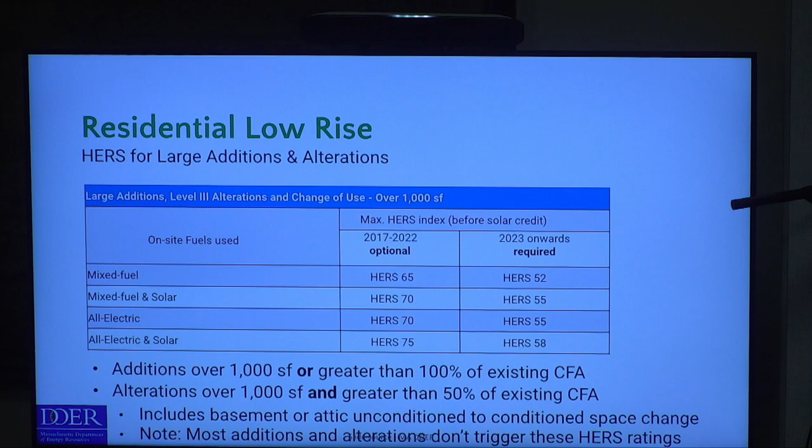So again, pretty much the same thing. If you're going to be doing additions, people are going to try to play games with the square footage, but it's basically conditioned floor area. So if you do 500 feet here and 400 feet there, that's 900 feet, and you're still under the 1,000. But if you do 550 on one side of your house and 550 on the other, that's going to be 1,100 feet of conditioned area. So just be careful—take a look at the existing conditioned floor area, and you have to do some calculations to see what applies to you.

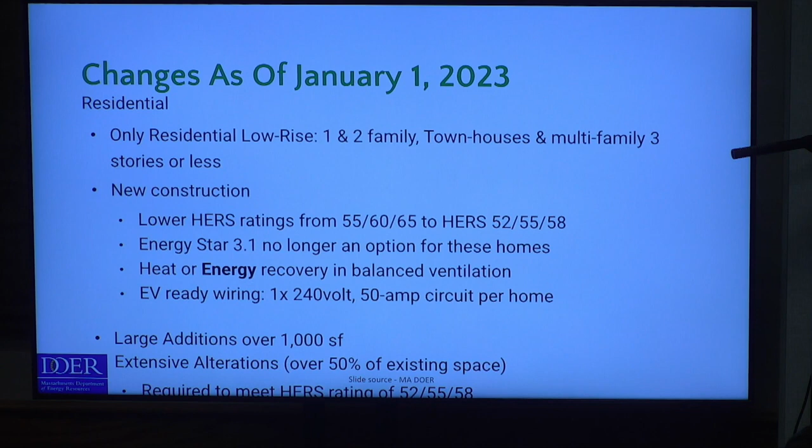Okay, so as I mentioned, this code is in effect right now. New construction, you can have a tighter HERS rating. You can see there it's dropped a little bit. Energy Star is gone. You need the ERV and you need EV wiring. So we can skip this one, it's kind of a recap.

Okay, and again, Keith kind of hit this one a little bit. So if you have an all electric home, you're basically going to have to have a heat pump and some sort of heat pump water heater. Your domestic water, you want to have an electric heat pump water heater. You're going to have better air sealing. And if it's a gas home, you're going to have to bump up to triple glazed windows and beef up your insulation and do a little bit of air sealing.

So Sherborn obviously has a very limited gas supply. Most of the houses around here are on oil. So if anybody's building a new house, it's almost a no-brainer to go all electric at this point. Okay, you can go to the next one here.

So Mass Save has huge incentives, and now there's some IRA money out there as well, and that's the Inflation Reduction Act. Sorry, long day here.

And also, if you're doing a renovation, I don't have the slide up here, but there are a ton of incentives for insulation. I think it was 75% when I did mine. That's what Keith said his was, and I think now it can go up to 100% in some cases. And there's incentives for heat pumps.

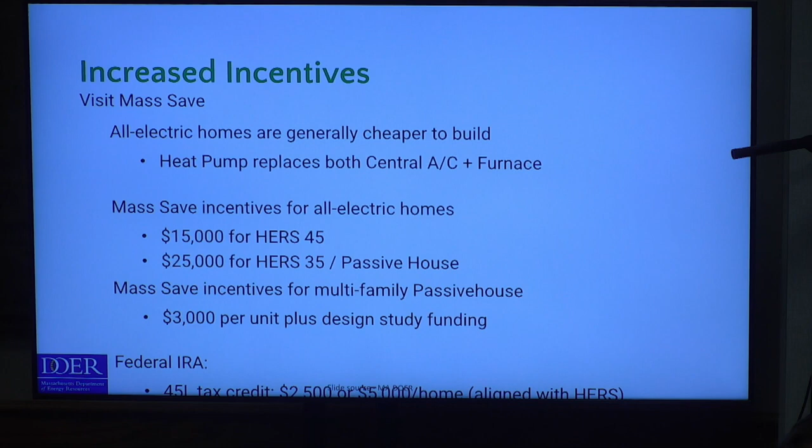So you can come up with something that looks pretty good generally for your house and get an incentive for it. This is just an example from the DOER, and with incentives, you can see that a house built to meet the stretch code is $20,000 less than the code-built house with all the available incentives.

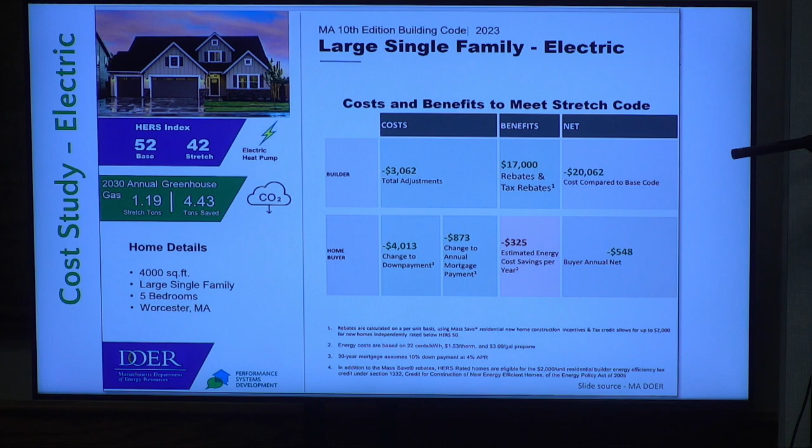They're just throwing a lot of money at this right now, and they've been focusing on residential, and now they're shifting their focus over to commercial. So they've infused the multifamily housing market like crazy. Everything that's going up is basically passive house these days because of all the money that's available.

Part of the reason is if you're going with these mixed fuel scenarios, in some instances, if you're putting in gas, the code's going to also require you to wire the house for future electrification. And it's not only putting in a conduit, it's also putting in the wire and breakers and getting the house ready for electrification in the future.

So especially here in Sherborn where there's not a lot of gas, it's just tipping the scales towards all electric. Okay, you can flip to the next one.

Okay, again real quick, big changes in the commercial stretch code. It used to apply to buildings over 100,000 feet. Now it's buildings of all sizes, and it includes additions, renovations, and alterations.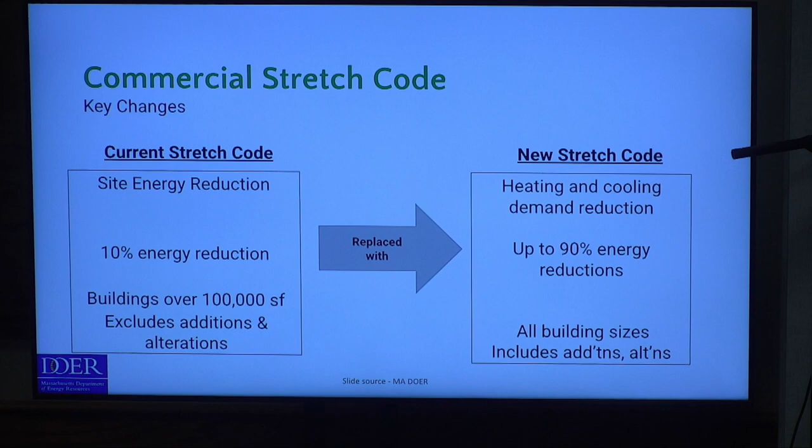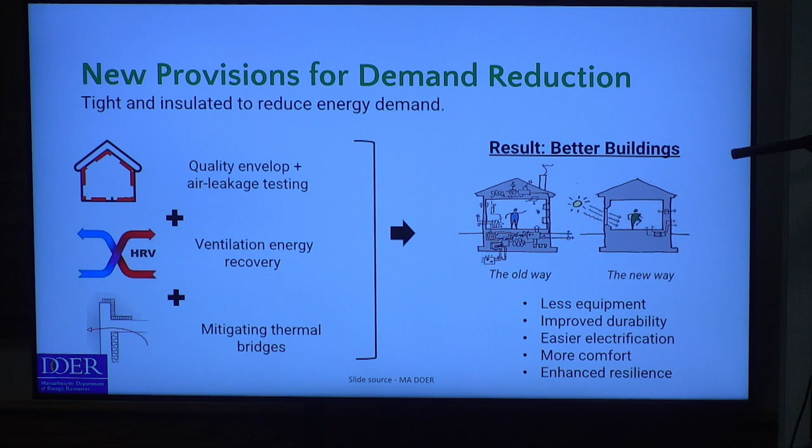Okay, again, same thing, Keith's presentation nailed this one, so we can just skip right over this one.

Again, this relates to the commercial, very similar to, there are alternate compliance pathways in commercial construction that aren't available for residential.

Passive house is one of them. There's a HERS, TEDI, passive house, and there are two others that I have written down on another slide, but I forget. Basically, the passive house requirement is the one that I think a lot of people are going to be pursuing, just because it's easy.

The TEDI score comes from a thermodynamic study where you look at your heating and cooling demands. I'm not an expert in TEDI at all, but I've heard it's pretty aggressive to try to go the TEDI pathway. So most people will probably go with either HERS or passive house.

There's a little more info in that NEAP FAQ that you referenced. This stuff gets really into the nitty gritty, there's a lot of nuance to it, and if you're building a commercial building, you're definitely going to want an engineer who understands this code to take a look at it.

And a lesson in acronyms - a lot of them. All right, again, some quick bullets on additions.

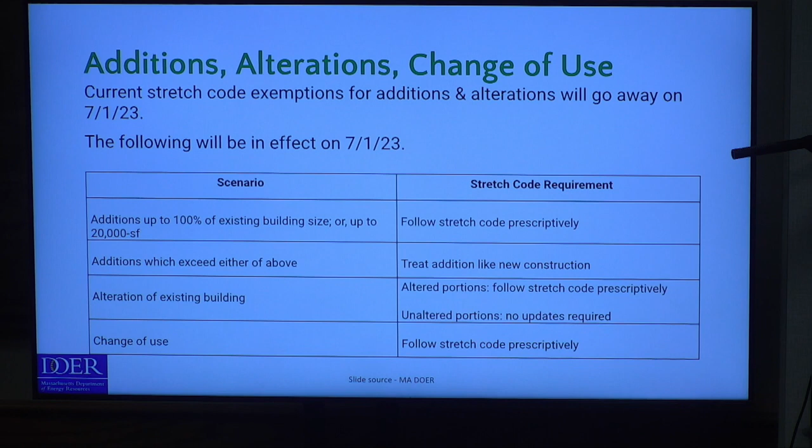Again, the envelope backstop has to deal with window to wall ratios. So if you have a curtain wall system or something like that, it's the amount of glazing on the outside of the building as a ratio to the wall. If you go over a certain amount, they basically require you to fully electrify the building. If you're below, you can take a mixed fuel pathway, meaning a combination of electric and gas.

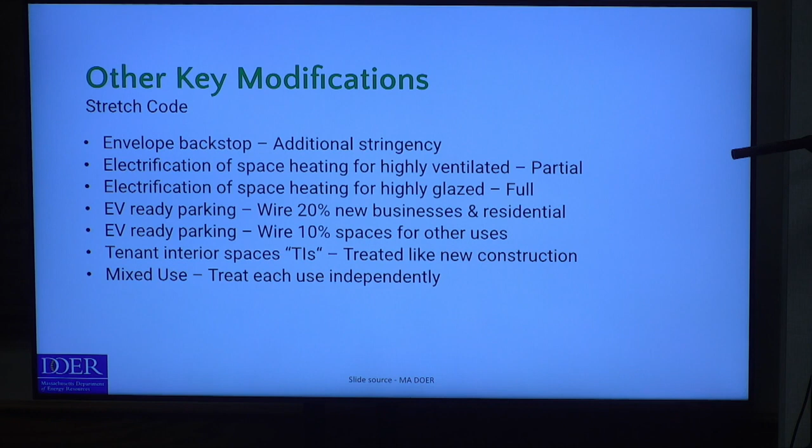Again, some nitty gritty that I don't think applies too much to Sherborn - it's 8 right now, so let's skip this, we'll skip the next few here. This is just a quick life cycle analysis - we'll hit this one, why don't we go to the next slide here.

Basically, that team did a study and looked at the premium for first cost, and then looked at the life cycle costs. In some instances, without incentives, certain buildings didn't qualify for incentives previously, but with the Inflation Reduction Act and the Mass Save commercial program coming out now, I think these first costs are going to actually go down.

Brad had a perfect example with his house - once it's running, your energy use is so much lower that you're going to have operational savings year over year. And what that translates to in the climate plan is that there'll be less carbon emissions from all these buildings, heading towards less carbon floating around the atmosphere.

All right, so this is now the specialized opt-in code. The first is the base code, which we don't worry about really because we follow the stretch code here in Sherborn. Specialized code is a code that would need to be voted on and approved by the town.

For residential, it applies to new homes over 4,000 feet, and they can either go all electric or zero energy. Again, if you're following the conversations, it's not really that hard if you're building a new building to go net zero.

Okay, let's just skip this one. Is this it, one worth two, mentioning the multifamily developments that will be in the specialized code? Yep, let's go one more, I think. Maybe not that. Yeah, so if you look to the right there...

So Keith, were you talking about multifamily, like going passive house or something like that? Yeah, it depends on the size of the building and the number of stories, which way you'd have to go. For the regular stretch code, you're already going to have to go either passive house, TEDI, or HERS for multifamily residential.

If you go passive house, 5 stories or less, or over 12,000 feet, 6 stories or more, TEDI or HERS. So it changes, right? There's like a phased approach to the specialized code. There's a threshold that allows you to choose other pathways, but then in July 2024 it goes to all passive house. Right now it's basically passive house under 12,000 feet, and after that, if it was adopted, it would be passive house for everything.

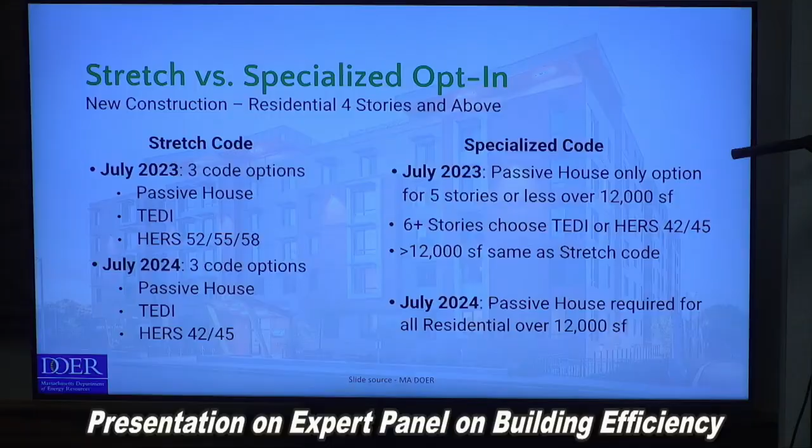There's something like 10,000 - there were about 20 passive house units in Massachusetts in 2018, and now there's over 10,000 certified passive house units. It's crazy how quickly it's growing. They're offering rebates per unit with developments that actually make it cheaper to build a 5-story mid-rise residential building than building it to code.

So you'd be forced, as of July 2024, if you're building multifamily over 12,000 feet, to build it as a passive house. For other commercial buildings, there are 3 different pathways you could pick, and you could follow any one of those.

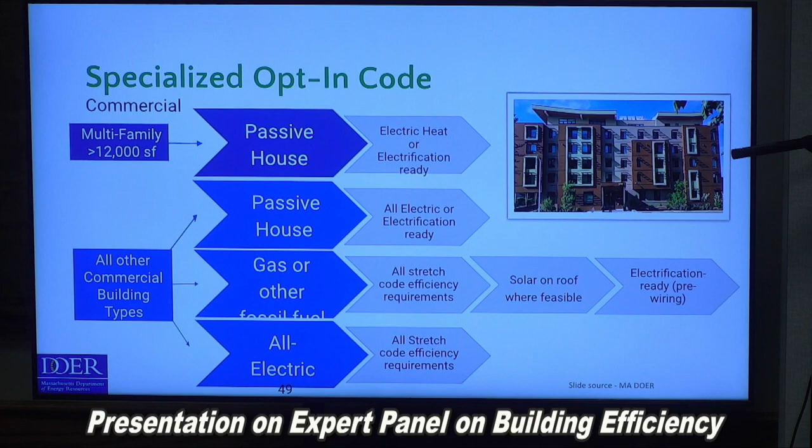Schools and offices are a little bit different - again, more of the same for commercial. We can buzz by this one.

So the specialized code - basically the way this works is they recommend a 6 to 12 month adoption period. So if a town votes on the specialized code and approves it, it's either going to become effective on January 1 or July 1, and typically you're going to wait at least 6 months. So if you passed it in May, it would become effective in January of the following year.

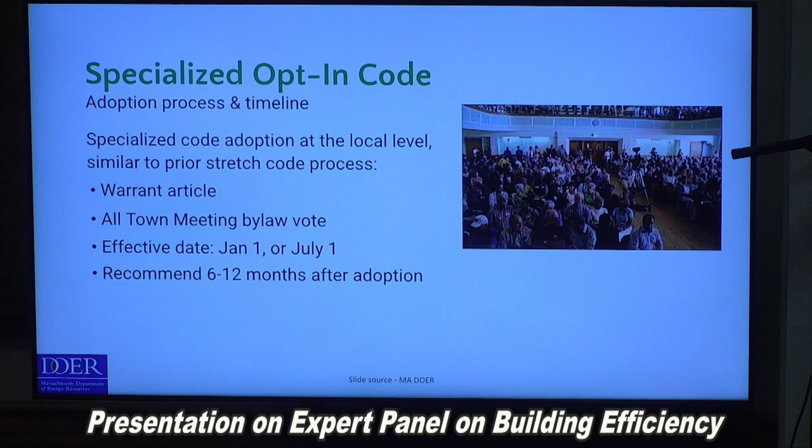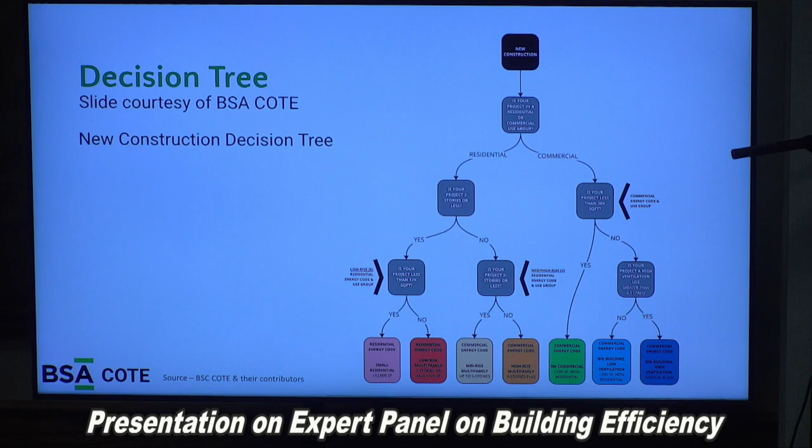Okay, these are some decision trees. We don't need to get into these now, but you can refer back to this. If you're looking at your project, this is just to help you try to figure out which pathway you can follow and where to go for your information.

Again, the timeline - we've kind of covered this, so we can blow past this one. And these - we've kind of hit on this stuff. Some boilerplate material, but very clear answers for some typically asked questions regarding the specialized code and the stretch code. So we can skip these.

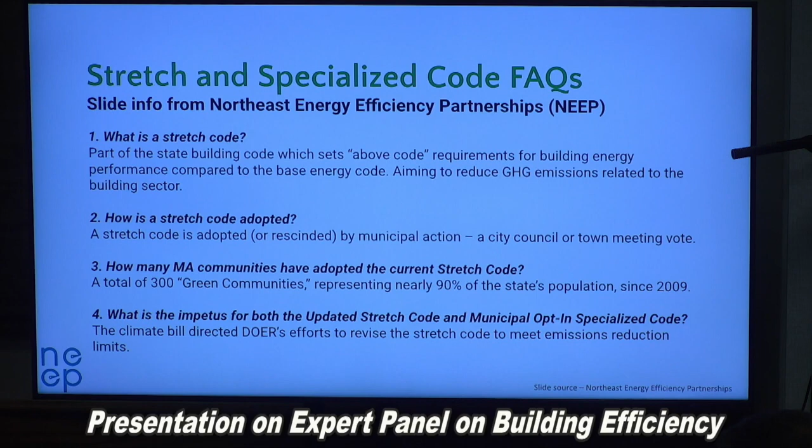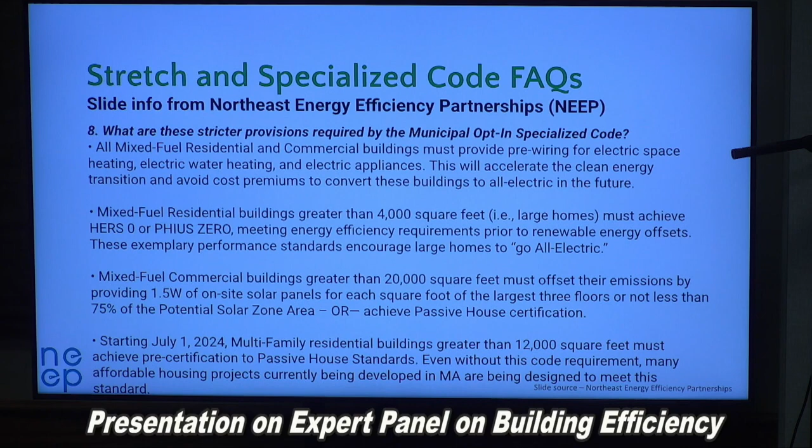Net zero, healthy building, low energy costs - so it's not more expensive. We proved that one wrong. Keith hasn't had a sinus infection, so we know they're healthier.

They don't require solar PV - solar PV readiness is a requirement. But again, I've got a solar system on my house right now, and it's only been on for a little over a year, and it's cranking. With the paybacks from the SMART program and the incentives out there, it's been great.

So if you have an existing home, no impact to you. Stretch energy code, specialized code doesn't mean anything - keep doing what you want. You don't have to take out your gas stove, you don't have to make any changes, right? No one is coming for your gas stoves.

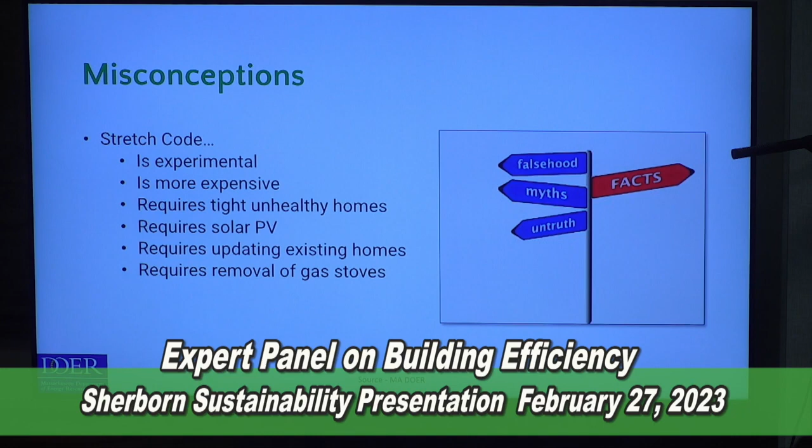One other thing we've been talking about is acronyms, like heat pumps. The beauty of the heat pump is that it uses a refrigeration cycle. Remember when Keith talked about dumping 20 gallons of oil - an oil furnace is only about 80% efficient, so 20% of that heat is going up the chimney. With a heat pump, you put in 1 unit of energy and get 2.5 units out. So you're not really creating heat by burning fossil fuel, you're moving heat.

Same theory as when you put a warm 12-pack of seltzer in your fridge - you feel heat pumping out the back. The refrigerator is moving the heat from that seltzer outside.

If you have a big house or building with multiple heat pumps, you can get branch circuit controllers. Usually the outside of the building needs more heating and cooling than the interior, so you can use these branch circuit controllers to take heat from one part of the building and move it to another part. That way your COP goes from 2.5 up to 5 - you're using 1 unit of energy to get 5 out just by moving heat within the building.